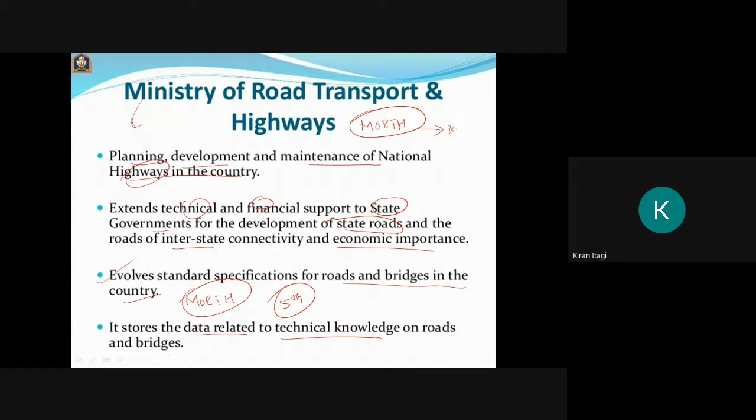Again, Highway Research Board: to ascertain the nature and extent of research required, to correlate research information from various organizations in India and abroad, to collect and correlate results of research, and to channelize the consultative services.

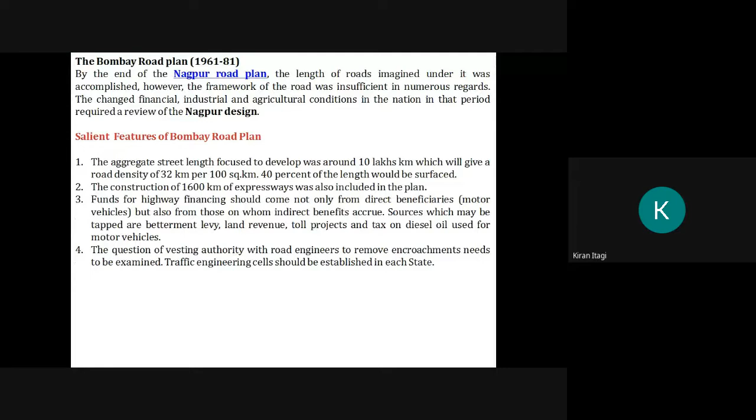Okay, now we are dealing with a very important topic. Your exam is in offline mode, which means one question will be from either the first 20-year plan, second 20-year plan, or third 20-year plan, or they may ask you to distinguish between the first, second, and third 20-year plans. So we will see the first 20-year plan. Here also the date is most important.

Okay, the first 20-year road plan was started in 1943 and it ended in 1963, means 20 years. Okay, we will see what are the important points. The conference of chief engineers was held at Nagpur. And one more thing, the first 20-year plan is also called the Nagpur Road Plan. Okay, remember this one. Either he may ask explain the first 20-year road plan or Nagpur Road Plan.

Okay, the second 20-year road plan is known as the Bombay Road Plan, and the third 20-year road plan is known as the Lucknow Road Plan. Okay, remember the alternate names also. So the first 20-year road plan was held at Nagpur in 1943, finalized the first 20-year road development plan for India and called the Nagpur Road Plan.

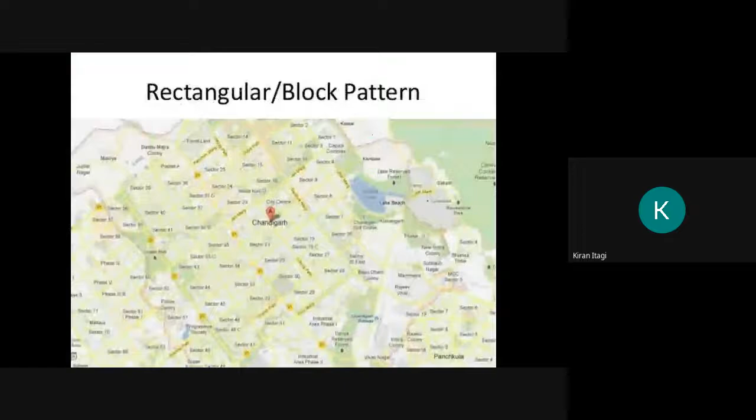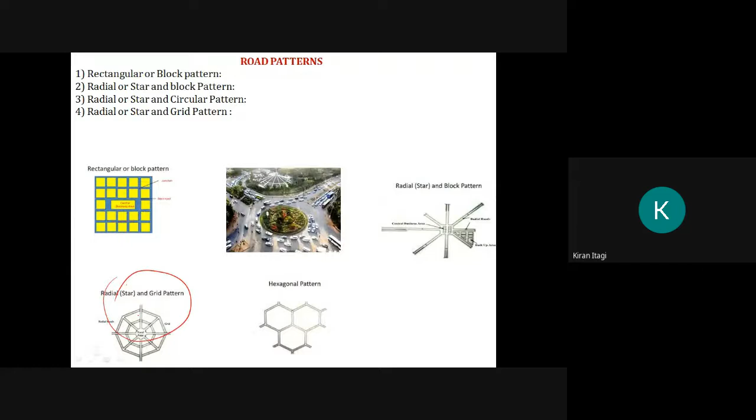The formulae were based on the star and grid pattern of the road network. Remember, the first 20-year road plan was based on which pattern? Star and grid pattern. Previously, I have shown you. Star and grid pattern. Means which type of road network was there? It was a star and grid pattern of road network.

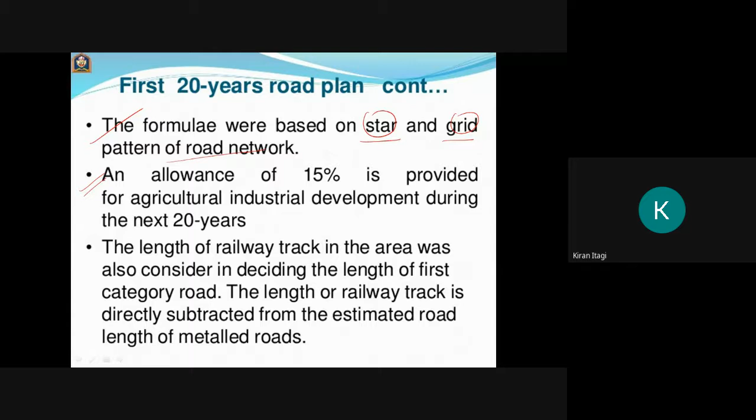Now, another important point, an allowance of 15% is provided for agricultural and industrial development during the next 20 years. So, how much percentage have they kept for agricultural and industrial development? Around 15%. The length of the railway track in the area was also considered in deciding the length of the first category road. They also considered it in deciding the total.

The length of the rail track in the area was also considered in deciding the length of the first road category. Sorry, my bad. Here the length of railway track was directly subtracted from the estimated road length of the metalled road. Here it is subtracted.

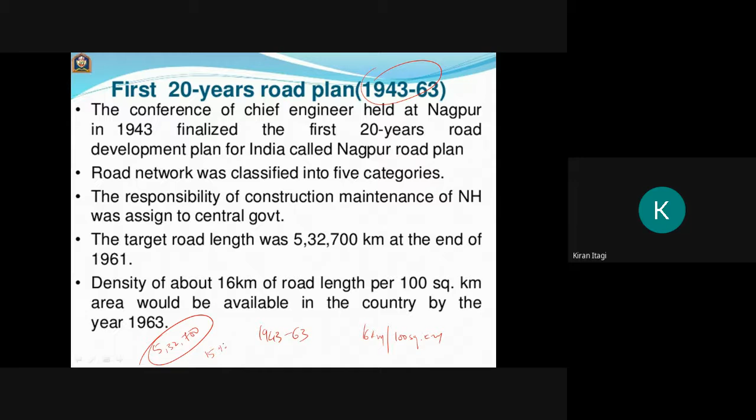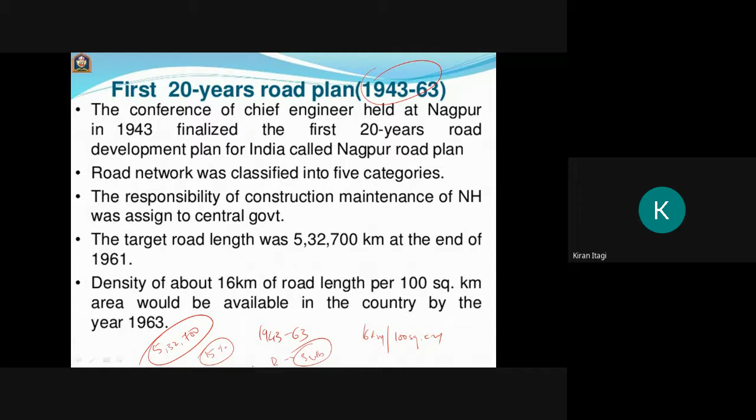So in the first 20-year road plan, the important thing is the date. It was started in 1943 to 1963. Density is most important, 16 kilometers per 100 square kilometers. Total length was 5,32,700 kilometers. And allowance given was 15%, and railway tracks were subtracted. These five are the most important points. One more: star and grid pattern.

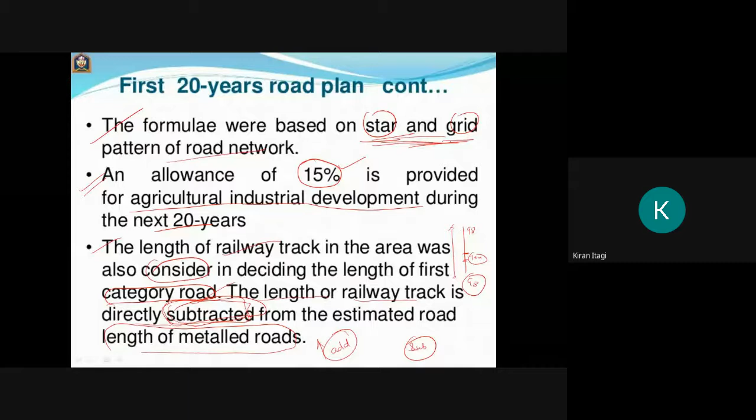Next, the second 20-year road plan. It is also called the Bombay Road Plan. It was initiated by IRC and was finalized in 1959 at the meeting of chief engineers. The target length was almost double that of the Nagpur Road Plan. Remember this one, that is 10,57,330 kilometers. And here the density is almost double, 32 kilometers per 100 square kilometers. In the first 20-year road plan it was 16 kilometers per 100 square kilometers, and here it is 32 kilometers per 100 square kilometers.

Every town, okay, this is also most important. Every town with population above 2000 in plain, and above 1000 in semi-hill areas and 500 in hill areas should be connected by a metal road. I will explain what this is.

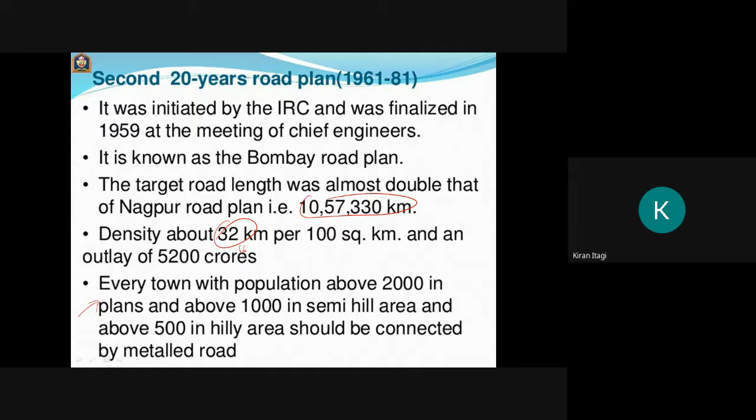Well, okay, and the density is most important. In the first plan it was almost 16, and here it is 32. In the first 20-year plan they did not give any importance to the population, but here they have given importance to the population. And here they went for the construction of expressways, they considered the length of the rail tracks, and they have given 5% for development.

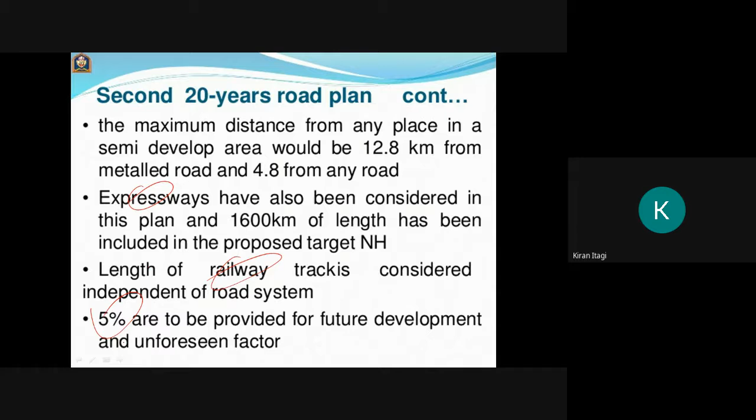Next important one is the third 20-year road plan. It ran from 1981 to 2001. The future road development should be based on the revised classification of the road system, that is primary, secondary, and tertiary. This road plan is also called the Lucknow Road Plan. Develop the rural economy and the small towns with all the essential features. Population over 500 should be connected by all-weather roads.

But in the previous second 20-year plan, they said 2000, 1000, and 500 in plain terrain, semi-hill, and hilly area should be connected by metal roads. But here he says the population above 500 should be connected with roads. And the density here is 82 kilometer per 100 square kilometer. In the first 20-year plan it was 16, second 20-year plan 32, and third 20-year plan 82 kilometer per 100 square kilometer. Remember that one also.

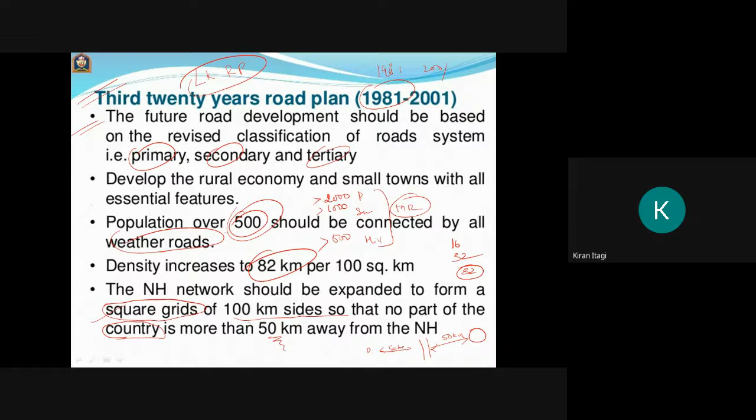The expressway should be constructed along the major traffic corridor. Okay, all towns and villages with population over 1500 should be connected by major district roads, and populations between 1000 and 1500 should be connected by other district roads. And anything with a population greater than 500 should be connected with an all-weather road. Okay.

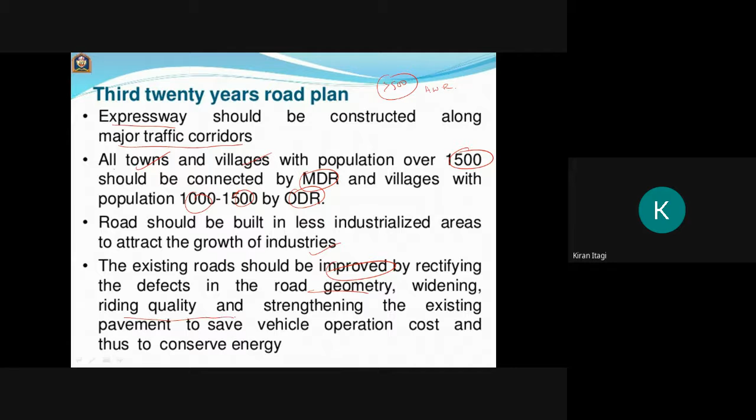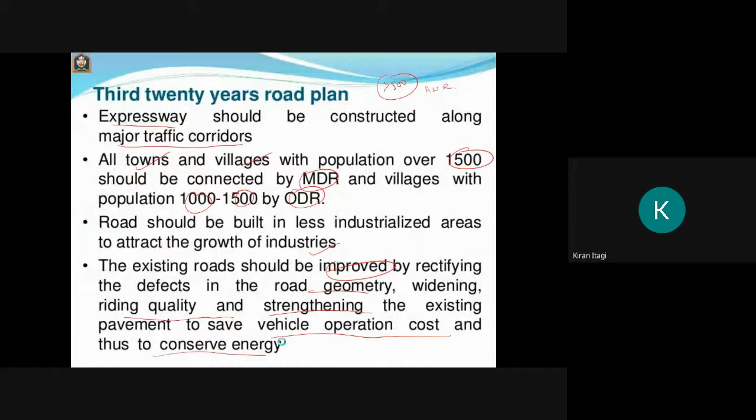Roads should be built in less industrialized areas to attract the growth of industries. Okay. The existing roads should be improved by rectifying the defects in the road geometry, widening, improving riding quality, and strengthening the existing pavement to save the vehicle operation cost and thus to conserve energy. Okay. This is all about the third 20-year road plan. The same thing is here: first 20-year road plan, second 20-year road plan, and third 20-year road plan.

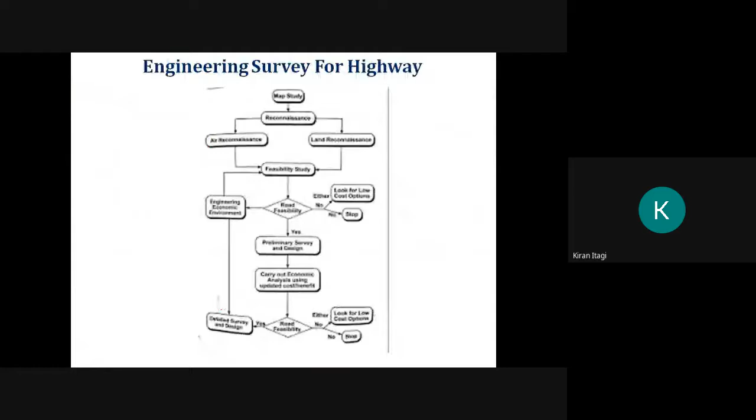Okay. Then engineering surveys for highway locations. Say you want to construct any type of road, either national highway, state highway, district roads, village roads, etc. So what are the surveys or the major preliminary things that we have to do before finalizing any alignment? Okay, so the first one is map study. Before a highway alignment is finalized in a highway project, the engineering surveys are to be carried out. In that, the first one is map study.

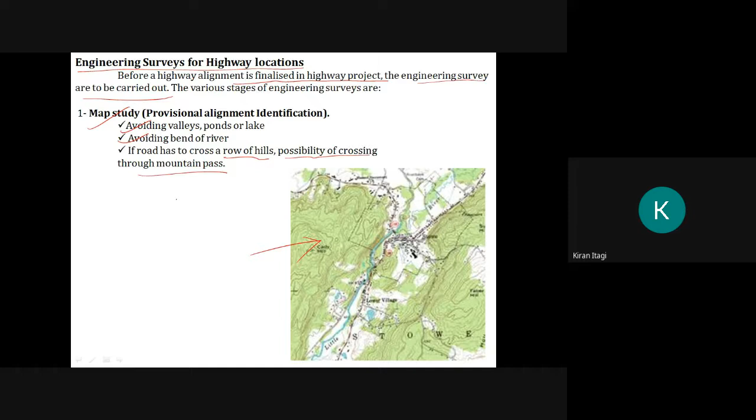Okay, either in Google Maps or any other sources, you will look into the map and determine what type of terrain it is by seeing the geographical features. See, avoiding the valleys, ponds or lakes, avoiding bends of rivers, and if the road has to cross a row of hills, the possibility of crossing through a mountain pass. So all these we do in the map study.

Reconnaissance survey, to confirm the features indicated on the map. Whatever we see in the map, we go on site and we examine it. Okay, to examine the general character of the areas in the field for deciding the most feasible routes for the detailed studies. So this is my map study. I have one choice, another choice, and a third choice. Okay, I have three alignments. So I will go there, see, collect all the data, and select which route or alignment is better.

Okay, a survey party may inspect along the proposed alternative routes of the map in the field with very simple instruments like Abney level, tangent clinometer, or barometer. With the help of the different types of instruments, we go on site and we check whether it is feasible or possible to construct a road this way or not. And we collect some additional details.

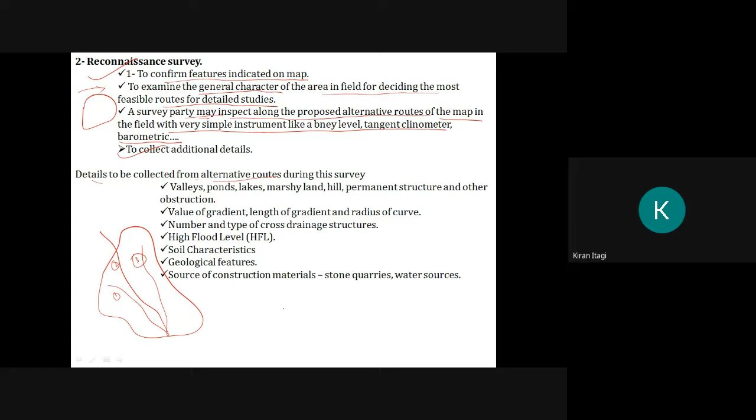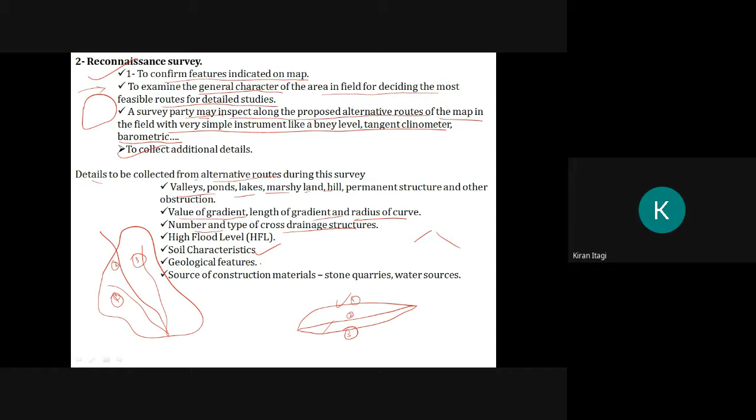Details to be collected for alternative routes during the survey. So first, in the map, I will select this first route, this second route, and this third route. So if you are changing from one to the second, then we have to go for some additional details, that is valleys, ponds, lakes, etc. Value of gradient, either a rising gradient or falling gradient, length of the gradient, radius of curves. Number and type of cross drainage structures, flood levels. Soil characteristics, geological features, and source of construction materials.

Then we have preliminary surveys and detailed surveys. Okay, to survey the various alternative alignments proposed after the reconnaissance and to collect all the necessary physical information and the details of topography, drainage, and soil. After finalizing that route, we will go into detailed surveying, with the help of instruments. We do these surveys, we provide some chainages, and we check the gradients, etc., and those things are done in the preliminary surveys.

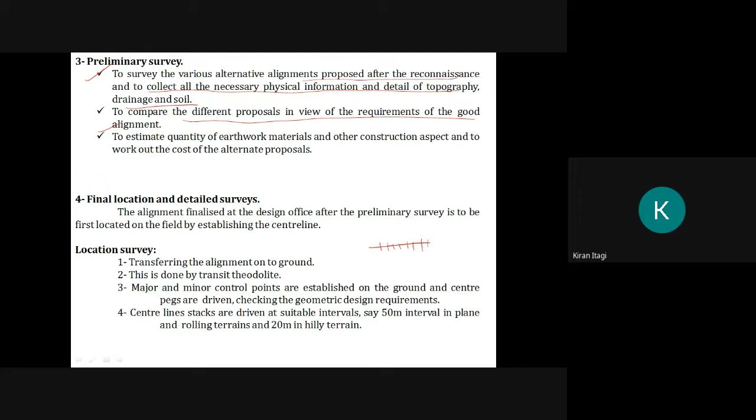To compare the different proposals in view of the requirements of a good alignment, to estimate the quantity of earthwork, we take the RLs. Okay, we take the levels and estimate how much earthwork has to be done. This one we call cutting, this one we call filling, and this line we call the formation RL. Okay. To estimate the quantity of earthwork, materials, and the construction aspects, and to work out the cost of the alternate proposals. The next thing is final location and detailed surveying.

Okay. The alignment finalized at the design office after the preliminary survey is first located in the field by establishing the center lines. As I said, for establishing the center lines, we provide chainages every 30 meters, and at curves every 10 meters, we take the cross sections of that road. Location survey: transferring the alignment onto the ground. This is done by transit theodolite. Major and minor control points are established. Then center line stakes are driven at suitable intervals of 50 meters in plain and rolling terrain, and 20 meters in hilly terrain. Okay.

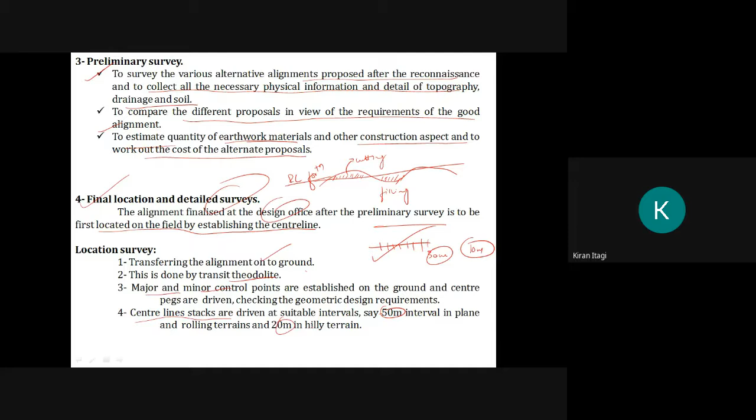Next one, requirement of ideal alignment. Okay. The first thing is that it should be shortest. For example, this is Pune, this is Bombay. Okay, we prefer the alignment should be shortest, or we will call it as a displacement road. Okay, what is a displacement? It is the shortest distance between any two points, but actually it is not possible.

So on doing survey, we will have like this, or we will have like this, but it is not possible to have a perfect straight line. So here the ideal requirement is that it should be as short as possible. Okay, so if you go by this road, say the journey from Bombay to Pune, Pune to Bombay, it is 150 kilometer. If you travel by the second road, say it is around 167 kilometer. So the ideal requirement should be the shortest. It is desirable to have a shortest alignment between any two terminal stations.

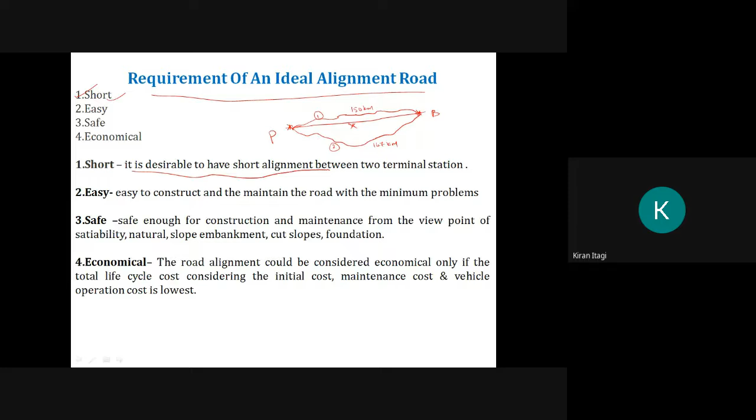The next point is ease. Okay, the mode of traveling from one point to another point should be easier, and it should not be much complicated or problematic. Okay, it is to construct and maintain the road with the minimum problems. Okay, the next one is safe. The journey should be safe. Okay, safe enough for the construction and maintenance from the viewpoint of stability, nature, slope, embankment, cut slope, foundations.

Okay, economical. Road alignment should be considered economical only if the total life cycle cost, considering the initial cost, maintenance cost, and vehicle cost, is lowest. All these three things should be as low as possible. Okay, remember, for MCQs they will ask what are the ideal requirements of the road. The first thing is that it should be shortest. The second thing, it should be easy. The third one, it should be safe and economical.

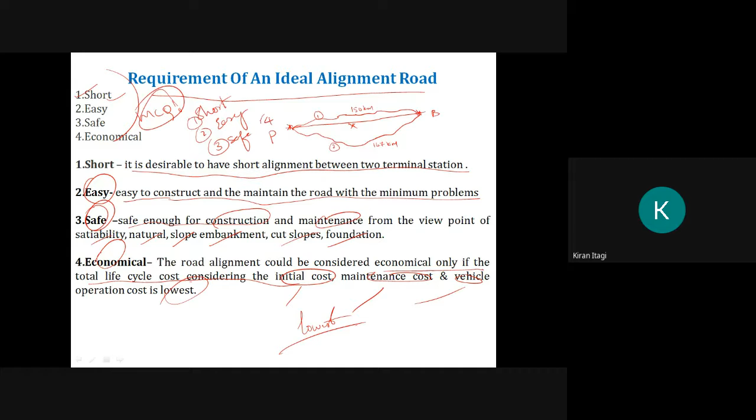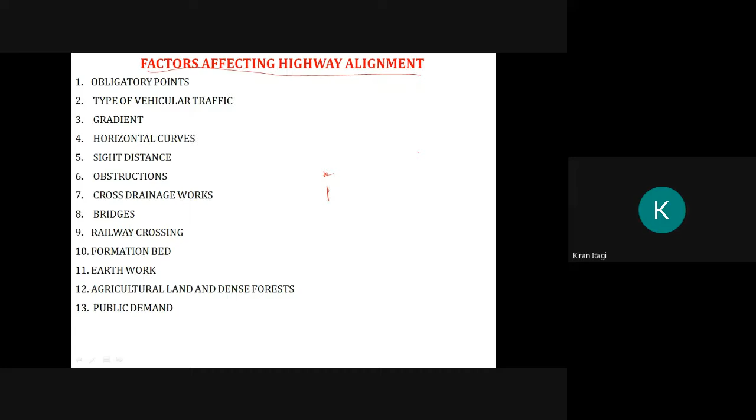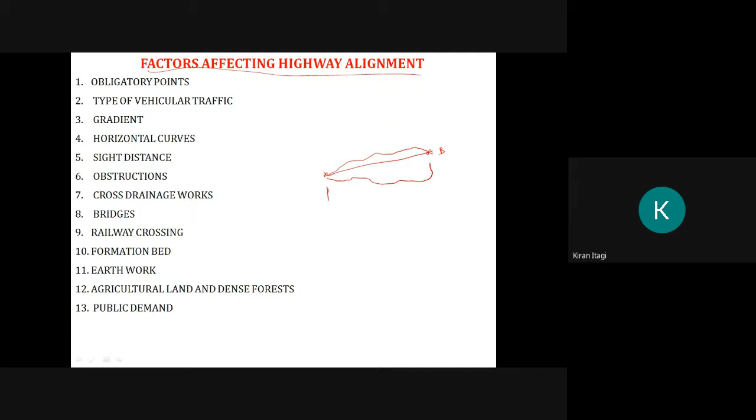Okay, factors affecting the highway alignment. So just now I said that this is Pune, this is Bombay, this is straight road, this is one road, this is another road. Okay, now I'm not talking about expressway. Keep it in mind. So before going to that one, here this is Swargate bus stand. Okay, and here it is Eon IT Park. Somewhere here I have Pune railway station.

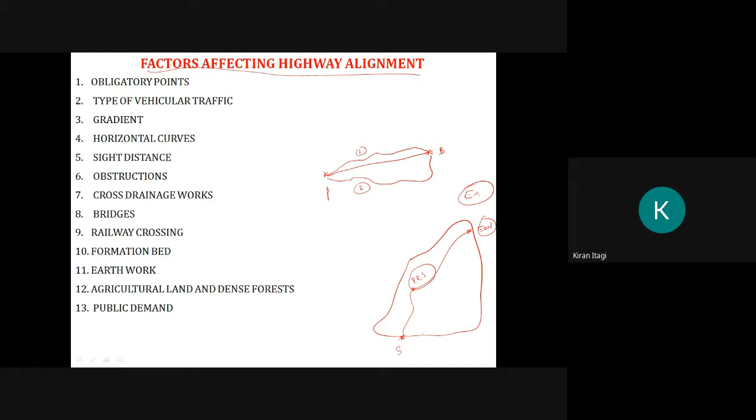You have observed, I think, the city buses which are moving from Swargate to Eon will pass through the railway station and they will go to the Eon. Okay, say somewhere here, it is ABC. It is going here. It will go through the railway station and it will go to the Eon. Somewhere here, this is XYZ place. The bus will go to Swargate, then to the railway station, then to the Eon. It means that we have some important places.

Okay, we have some important places that we can't ignore, such that we have to construct a road connecting to that place. See, here the road has been constructed from bus stand to the railway station because it is the most important station, most important point. Either it may be a railway station, a police station, a temple, or any type of central business area. Okay, so the network should connect to that point and it should be distributed from there. Similarly, while constructing a new road, we have to take care of all these points. The route should connect all these important points or important hubs.

Okay, and for example, while constructing a road, if you get any river, then you have to take the diversions. If not, we have to see that the river is flowing like this, and my road is coming like this. Okay, and I want to go here. I have two options, that I can cross the river and I can go like this, or I can take the curve here only. So the obstructions or hills, for example, now this is a hill here.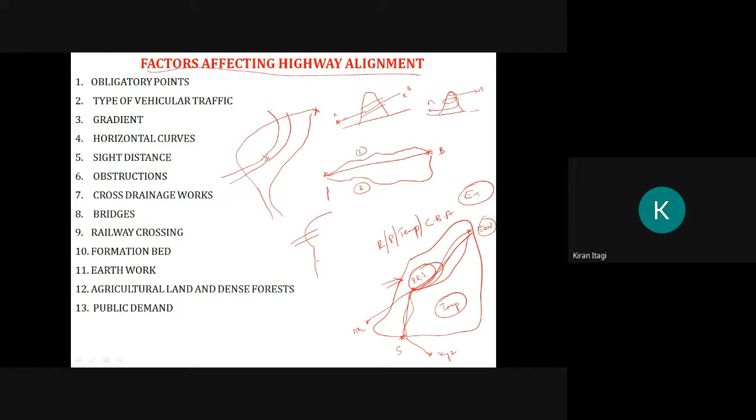Okay, I want to go from here to here, from A to B. I have two options. One thing, I can go by constructing the tunnel. By constructing the tunnel, I can go to the station B, or I can go like this and I can go to the station B. Okay, all these parameters should be considered while finalizing the alignment. So that is why we call these factors affecting the highway alignment.

The first one is obligatory points. Obligatory points are important points which we can't ignore. For example, railway station, police station, temple, central business areas, these all are very important things, so we can't ignore them. We have to take them into consideration. The second point is the type of vehicular traffic. Okay, whether there is a, one second.

Am I audible? Am I audible? Am I audible? Yes, sir. Okay.

Next, type of vehicular traffic. So we have different types of vehicular traffic that we will deal with in the third unit. So we can see, this is a road. We have some heavy vehicles moving, and we can see some commercial or small cars moving. So depending upon that, to divert that traffic, we have to construct the highways or the required roads. So that also affects it.

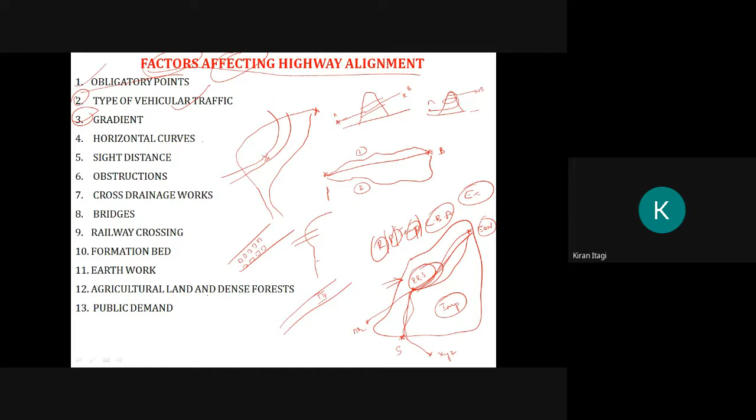Now the important point is the gradient, either a rising gradient or falling gradient, or plain terrain, that we have to take into consideration. Next we have curves. We have different types of curve, that is horizontal curves and vertical curves. In horizontal curves we have simple curve, reverse curve, transition curves. In vertical curves we have summit curve and valley curve. So depending upon that also we have to take into consideration, as you have already learnt in surveying.

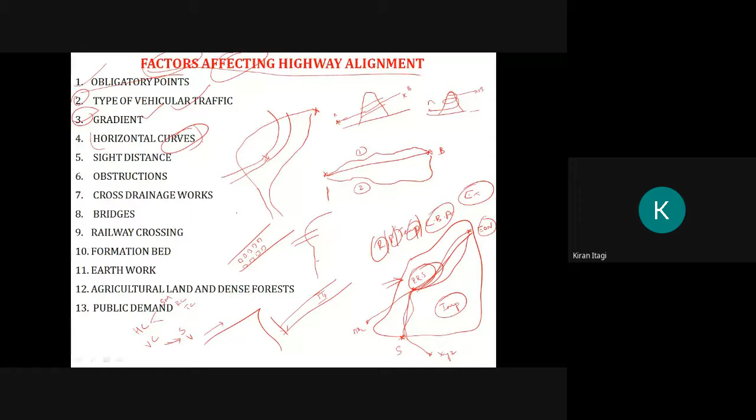Sight distance. What do you mean by sight distance? We have different types of sight distance, that is stopping sight distance, overtaking sight distance, intersection sight distance. We will deal with it in the second unit, and we have some numericals on these three. So sight distance also plays an important role.

Next, obstructions. Obstructions may be a river, a building, or any kind of towers. These are the factors that we consider. CD, that is cross drainage work, bridges, railway crossings, formation bed.

See, this is my road. At this side there is a river. So my formation bed should be high enough that the river water will not come on the road. For that, we have to determine the full flood level, FFL. FFL means full flood level, that we have to determine, and we have to raise our formation bed or embankment.

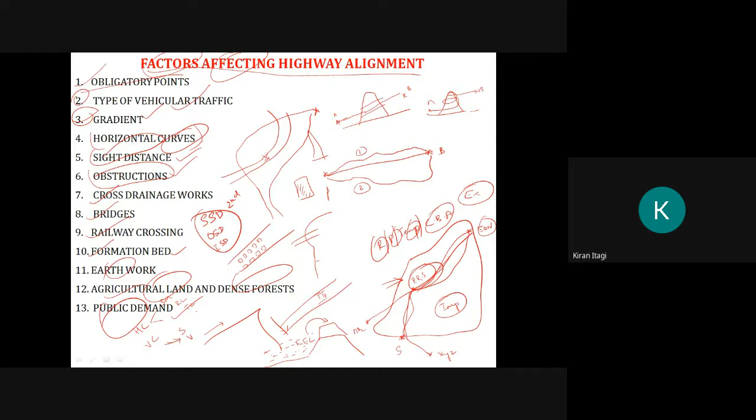Next, we have already seen this one, new highway project. For planning a new highway, what things are to be considered? Map study, reconnaissance survey, preliminary survey, location of final alignment, detailed survey, material survey, geometric and structural design, earthwork, pavement construction and construction controls. These are the important things we have to consider in a new highway project.

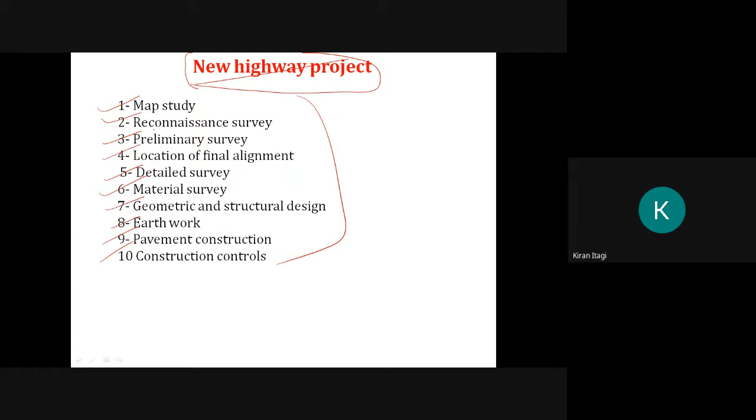Okay, we are at the last part. Here we have only one type of numerical, and it is very easy. He will give the area of a state or city. He will say calculate the length of national highway, state highway, major district road, other district road and village roads. So it is very easy.

Remember, he will give the area. If you divide it by 50, you will get the length of the national highway. This is how we calculate the length of the national highway. For example, if the area is 50 square kilometers and I want the length of the national highway, 50 and 50 get cancelled. The length of the national highway will be 1 kilometer, like this.

Similarly, the length of the state highway: the formula is area upon 25. And also we have 62.5 multiplied by number of towns minus length of the national highway. So in the question, he will give the area of the state or the place, and he will give the number of towns in that area, 9 towns or 10 towns.

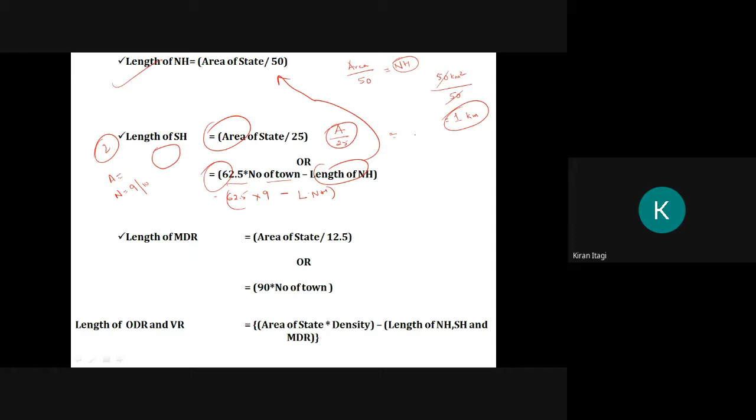So you have to substitute, that is 62.5 multiplied by 9, minus length of the national highway. You have already calculated it, just substitute the length of the national highway and you will get the length of the state highway. Here also you will get the length of the state highway, here also you will get the length of the state highway. Take the max one.

Next, length of the major district road. Here what we have to do, area upon 12.5. Here you will get one answer. Here 90 multiplied by number of towns, here you will get the second one. Take the maximum.

Next one, how to calculate the other district roads and village roads. The area of the state will be given. Density: if it is the first 20-year road plan, the density is 16, second 20-year road plan it is 32, third 20-year road plan it is 82. Just substitute the density, minus length of national highway, minus length of state highway, minus length of major district road. You will get the length of other district roads and village roads.

Okay. So in the next class... what is the time? 12:55. 5 minutes is there. Okay, I will take one numerical. Be fast with pen and paper. The numerical is very simple. You are not supposed to do much more in that. Okay.

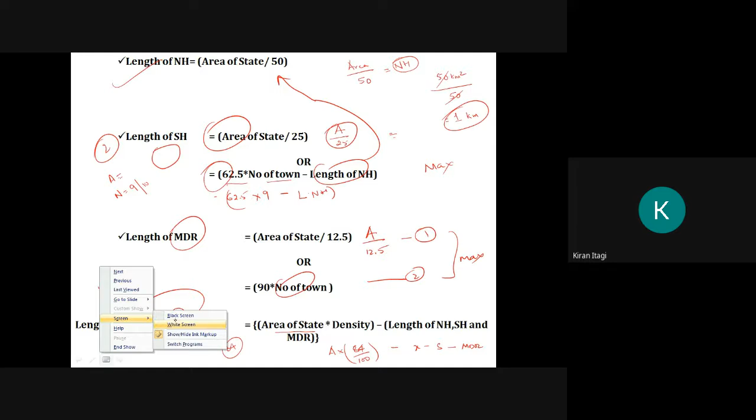So the question is like this: determine the road length of different categories of road in a state in India by the year 2001. Use the third 20-year road plan. The total area of the state is 80,000 square kilometers. Total number of towns as per 1981 census is 86. Overall road density given is 82 kilometers per 100 square kilometers.

If he has not mentioned the 82 density, the first 20-year road plan is 16, the second 20-year plan is 32, and the third 20-year road plan is 82. You have to remember this. Now, first step, length of national highway. How will we calculate it? Area upon 50. Area given is 80,000, divided by 50. How much will you get?

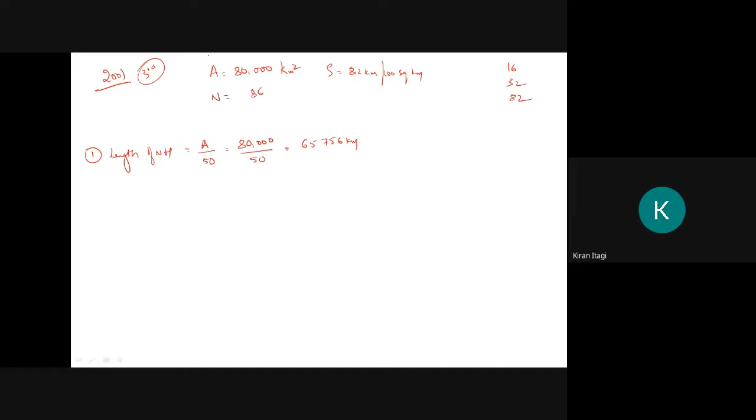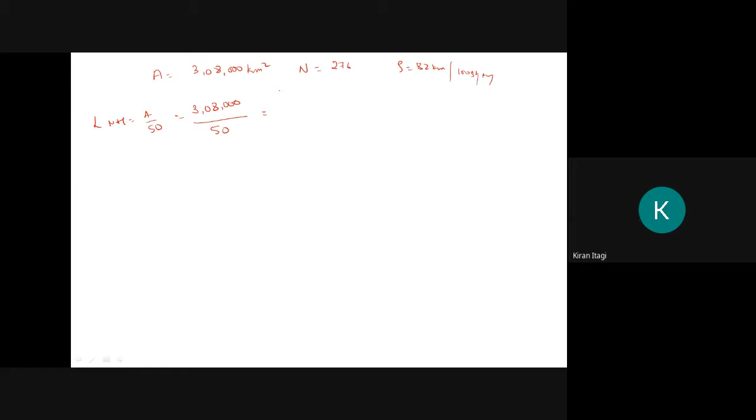1 second. Area equals 3,08,000 square kilometers, and towns equal 276. Density will be 82 kilometers per 100 square kilometers. Now length of national highway equals area upon 50. 3,08,000 divided by 50. I'll open the calculator. It is 6160 kilometers.

Next one, length of state highway, which equals area upon 25. 3,08,000 divided by 25. It is 12,320 kilometers. We have another formula to calculate the length of the state highways.

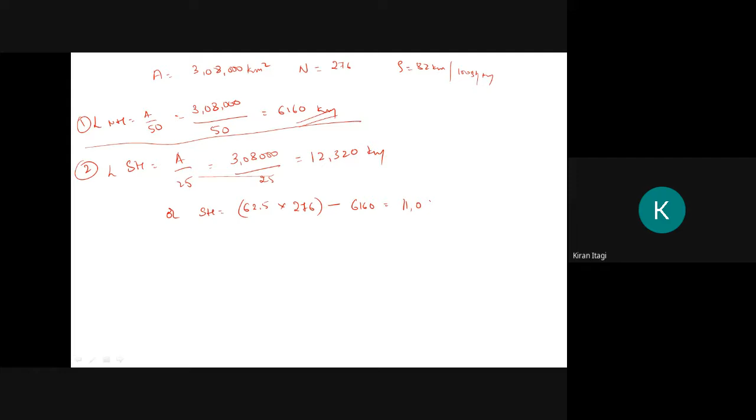Length of state highway equals 62.5 multiplied by number of towns, 276, minus length of the national highway, 6160. That is 62.5 multiplied by 276 minus 6160. It is 11,090 kilometers.

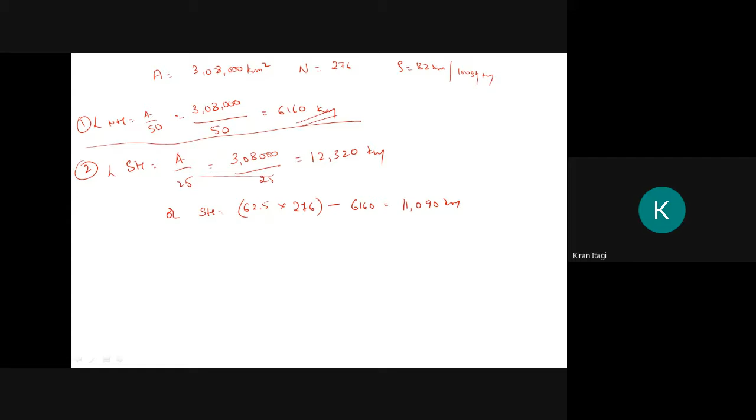We have calculated the length of state highway. Next, third one, length of major district road equals area upon 12.5. 3,08,000 upon 12.5 equals 24,640 kilometers. Or we have another formula: MDR equals 90 multiplied by number of towns, that is 90 into 276,

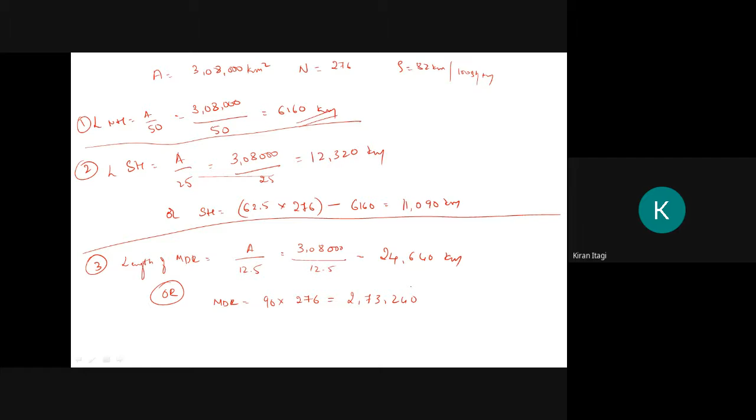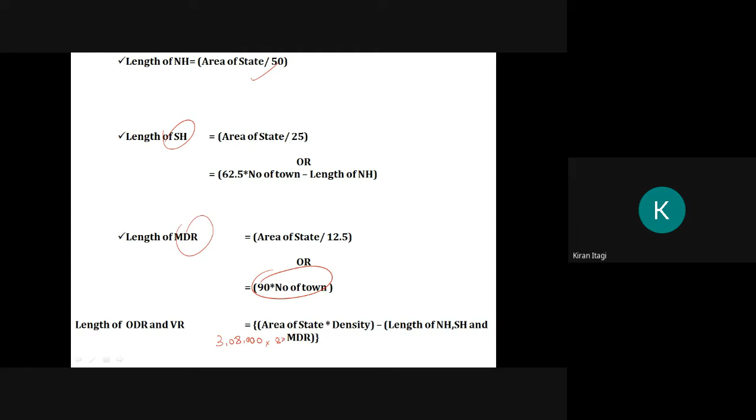24,840. All right. So we have calculated the length of national highway, state highway, major district road. After that, we have area and density, 82. Then we subtract national highway, state highway, and major district road, and we get the length of other district roads and village roads.

So this is just one example I have shown you. In the next class, I will solve 2 to 3 more problems.